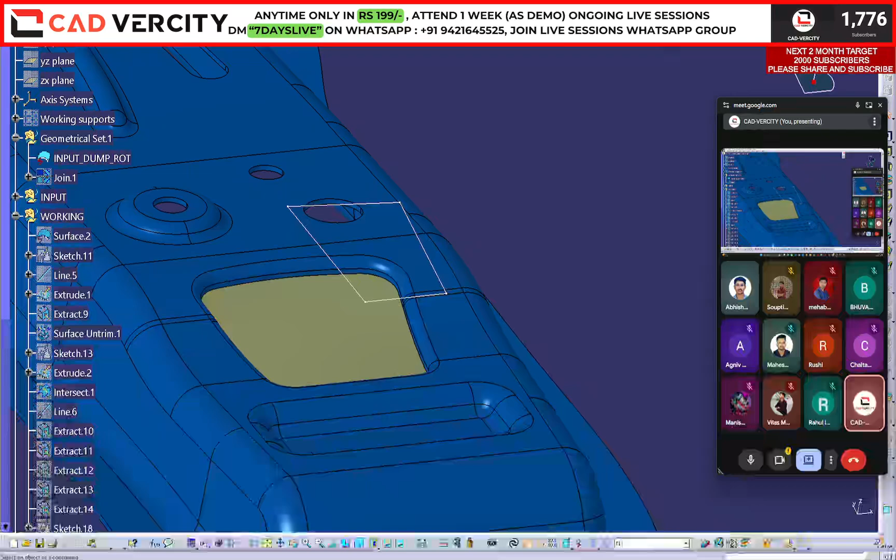Just- Yes. Okay, you are trying to match this one. Yes. Yes sir, I sketched only half of it. Positive. Then that...

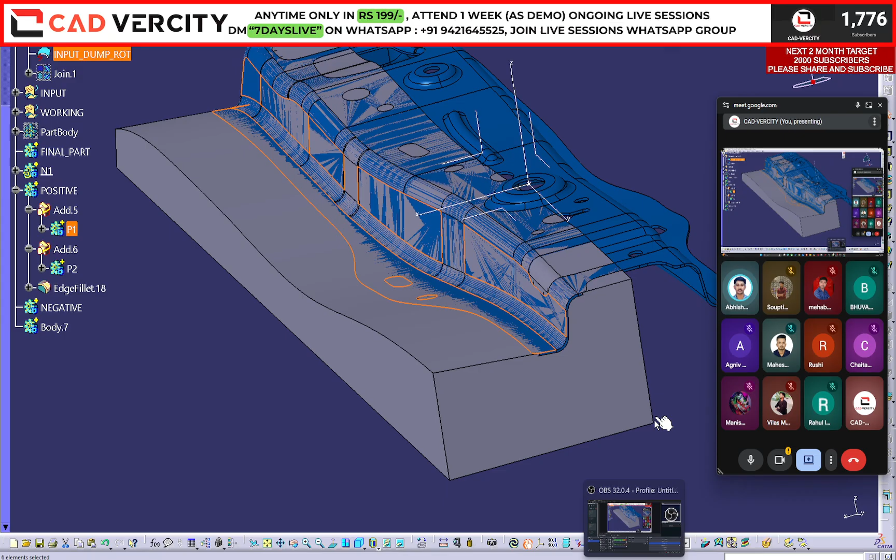No. You had done this side by your own or we discussed in live session? This. We discussed in live session, we discussed this, okay, up to this we have discussed. So you know how to match this one. Yes, I matched those two pieces, but the other side was not matching. This side is not matching.

No, not this, this is mirror side, the front side. Okay. This one. No, no, the just opposite side, the inclined one. This side, sir. I have tried by extracting these things. Which side is not matching? This one? The curved things, sir. The front side, the curve we have. The small gliding, sir, in the front. This extreme one? Yes, yes. Okay.

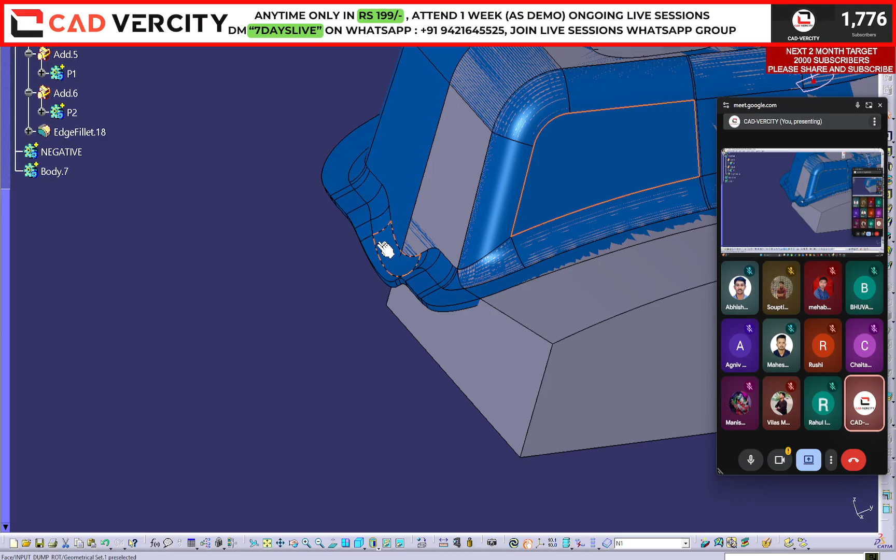Okay. We will work on this portion. So let's discuss. I think you had some issue on this pocket as well.

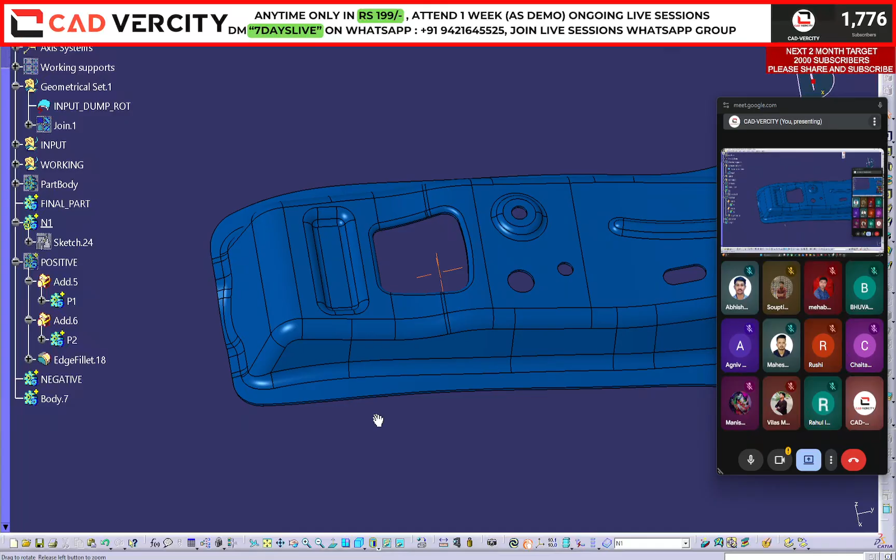Where is it? Do you have that body? This one? One sketch, it's working. Okay. Working. Okay. No issue. See. Let me extract this one. First, I will have to do some analysis. See, before starting anything, everything is kept extracted.

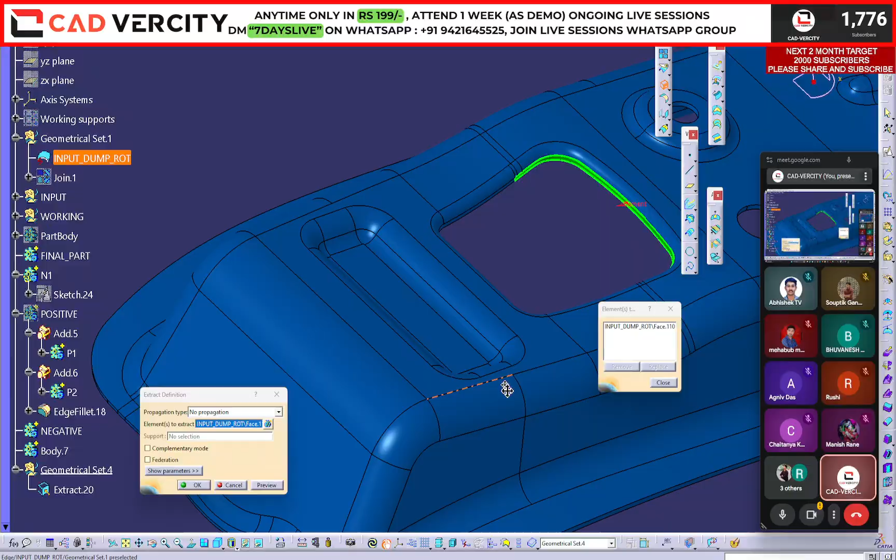Control 2. Let me take a new geometrical set separately for me only. Alt I G, enter, extract 1. No propagation. Multi selection 2. Okay, let's hide this one. Right click, keep over here, hide. Okay, now take the intersect.

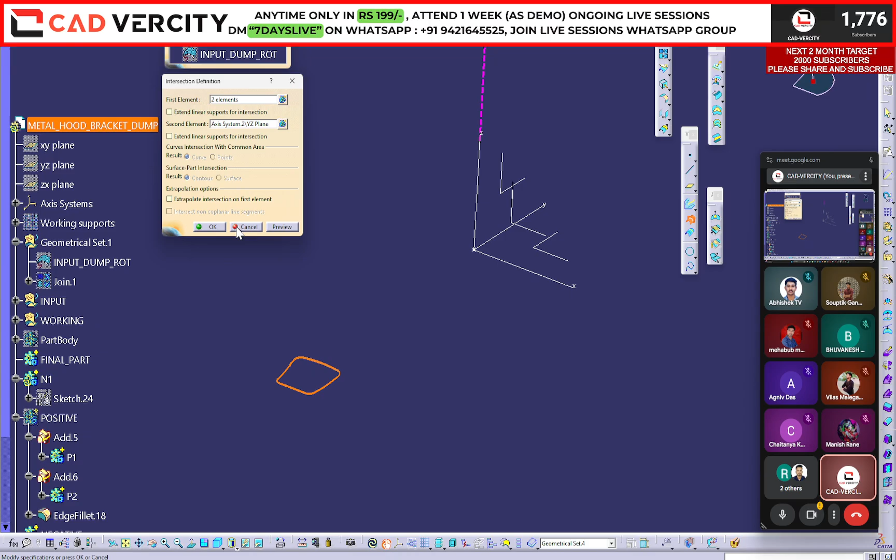See, in intersect also, let me show you. You can take intersect in one shot if you have two surfaces. See, we have two surfaces now, these two. So in first element multi selection, I will select both surface 1 and 2, close, and the second element I will select this one, and click on OK. See, I got intersect 1 and 2. Okay. Sir, what are you doing?

I just want to check is there any angle or not. Any geometry, this with MTD. See, there is angle 4 degree. This with MTD, 4 degree. Perfect. Similarly, I think there will be some angle with this as well. Yes sir, there should be an angle on the side too. So let's cross check. How? Let's put one line through this, or let's cancel.

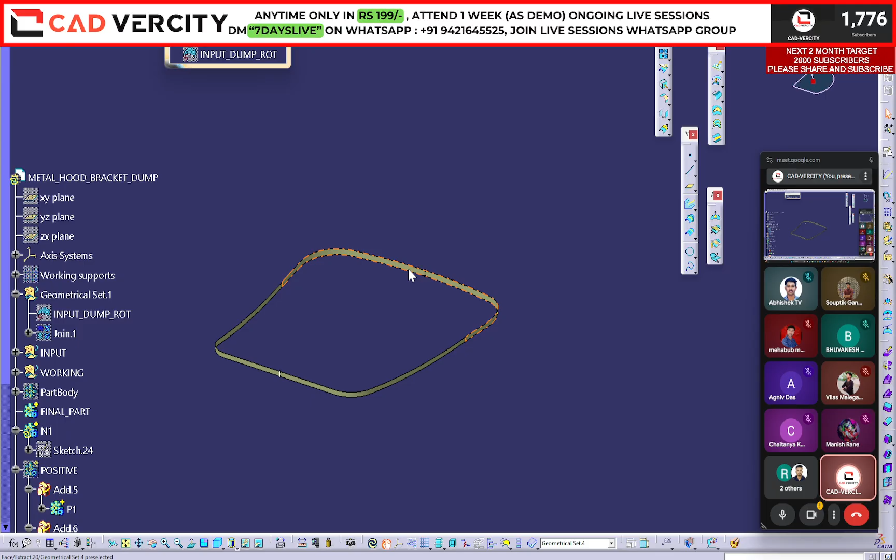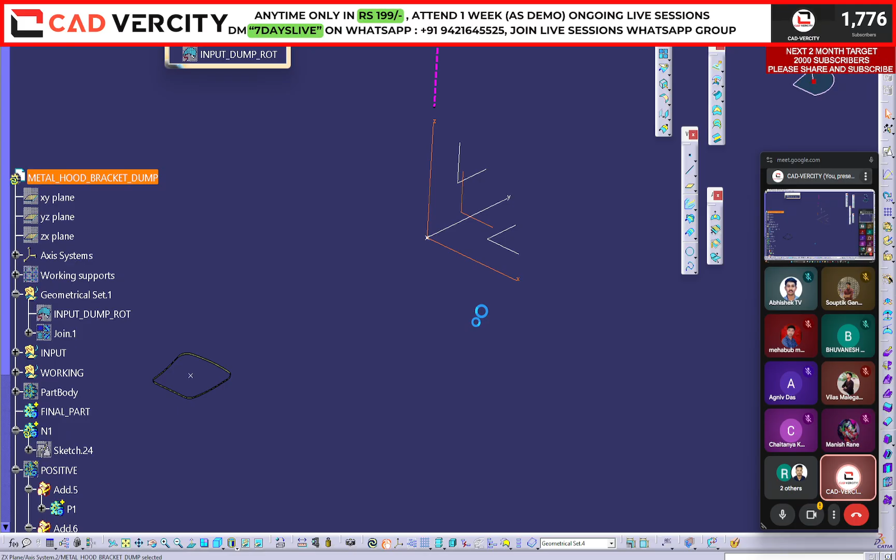Take a point in between this point and this point, middle point, click OK. Activate your master axis system, it is already current. So every time, if this is your master axis system, please change the property so it is understood clearly, and change the color, make it yellow or something else. It is already current, so let's take one axis system over here. By default we will get the same orientation like this one. Why? Because it is current.

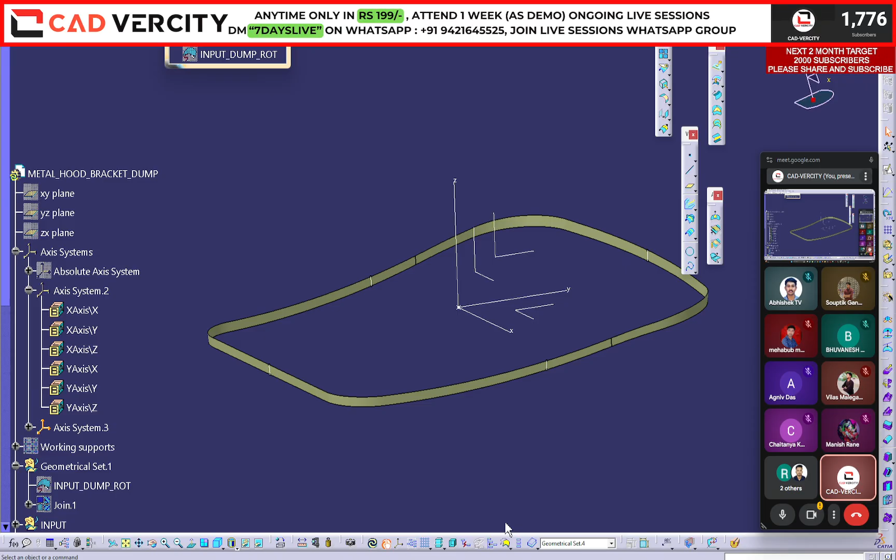Click OK. Now I will take the intersection. This is a single surface which will be in intersection with this one, click OK. This time you are getting two intersections, this one and this one. Do you want both? Yes. So I will click on keep all sub elements, click OK. Now let's measure the angle. Any geometry with this one. Angle is 4 degree. 4 degree. Perfect. Means we have 4 degree.

Okay, so let's do one thing again, with the surface, this one. You can do one thing. See, simple ways. Anyone knows what is a simple way? See what I will do here. Anyone? Manish? Top side sketch. Manish, Mahesh, we will draw this sketch in top side. Okay, no issue. But what will you do for the sketch?

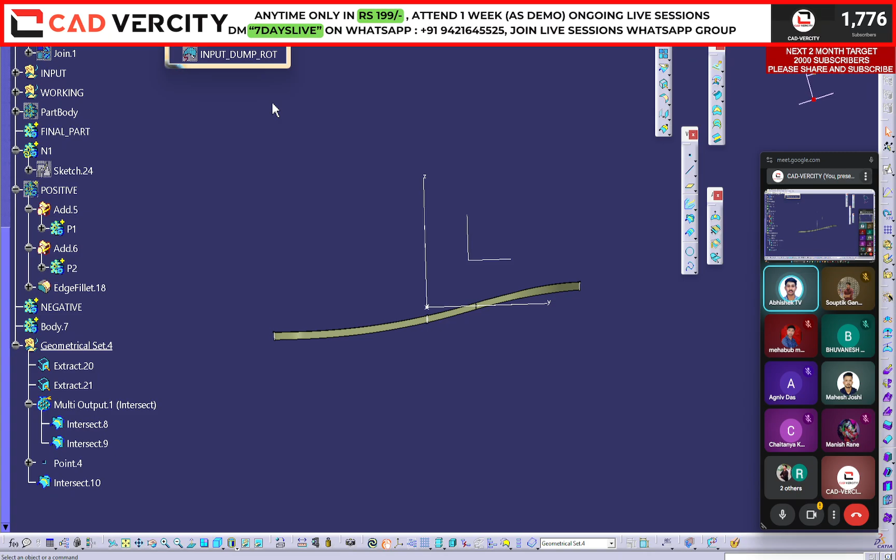How will you project? What will you project, sir? Which edge do we have to project? The inside one or the outside one? That is the question. What will you project? Its top edge? Rahul, what will you project? Why is the name showing? Mehabub, what will you project? Agniv, Bhuvanesh, Vilas, Manish, Chaitanya.

Yes. Hello. Can you hear me? Hello, hello.

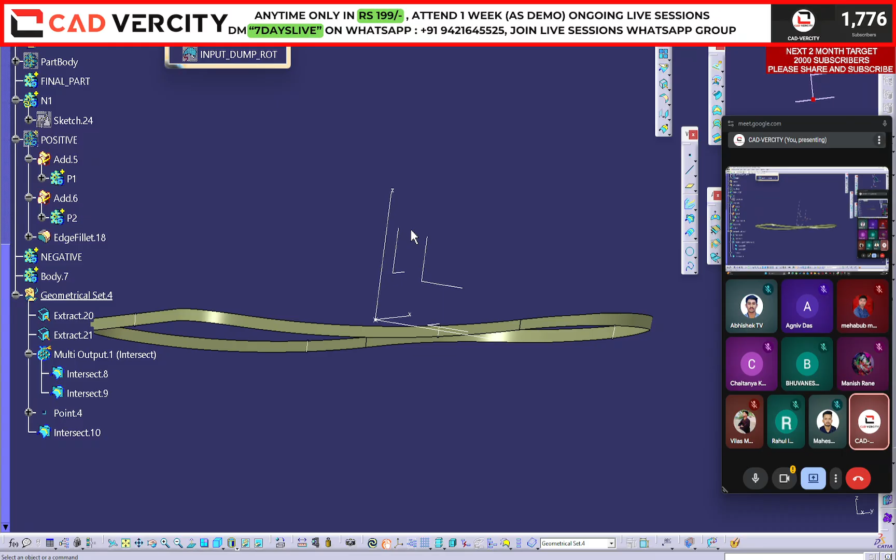What will you project? See, the simple logic is, tell me, you want to draw a sketch in the top plane, means your Z plane, yes or no? Are you getting any intersection of the surface with the Z plane directly? No. So can I extrapolate this surface by joining? Okay.

But sir, if in the tooling we have not projected those edges and drawn the sketch in the main tooling direction, it will not clear in tooling, I think. See, we have 4-degree draft. That means all sides should have a draft of 4 degrees. And with respect to the draft, we will need a neutral element, yes or no? Okay, so see, my logic will be something like this.

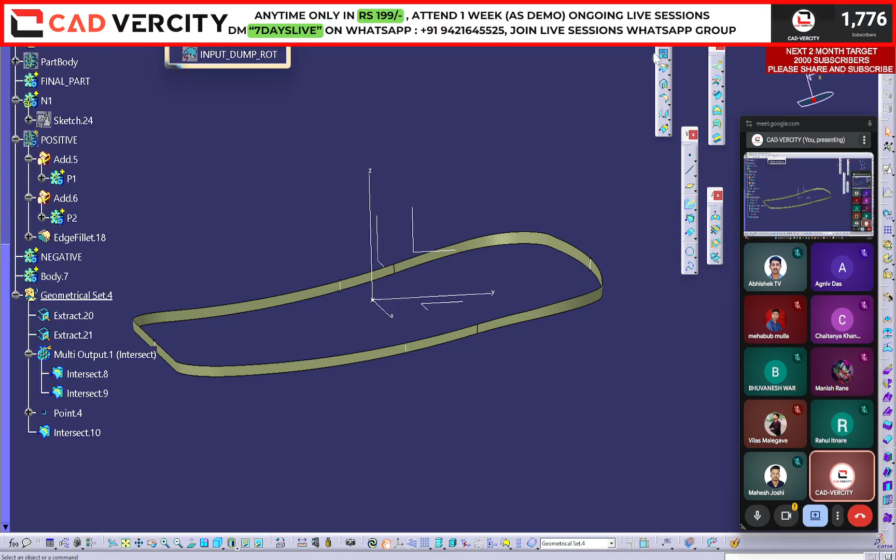I will join this surface. What I'm thinking about is the neutral element. Okay, I will extract this one in tangent propagation. I will extrapolate this. Good. Click OK. Hide this one. Extract upper surface now. Click OK. Extrapolate. Beginners, you can see what we are doing. Anyhow, we will repeat this one.

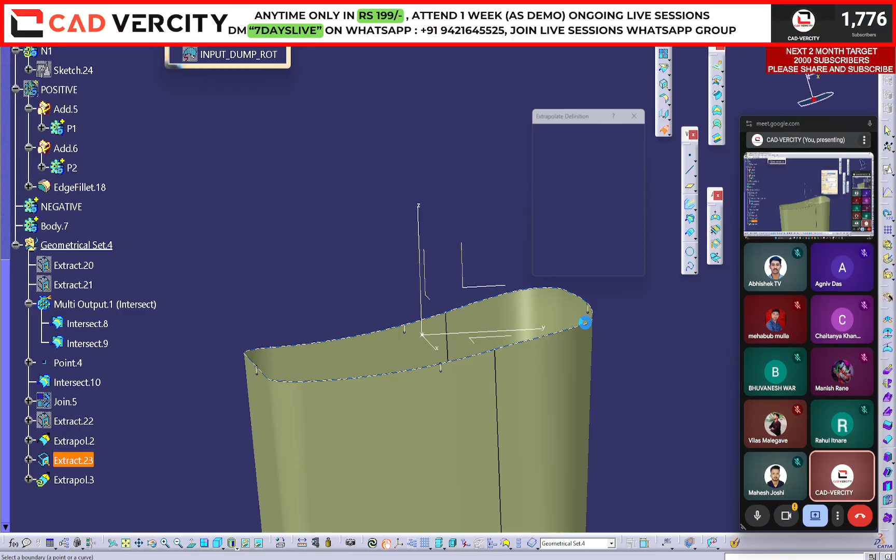Let me do one thing. Sorry. Undo. Redo. Where did it go? Okay. Done. Now tell me, can I take the intersection in the top plane? Yes or no? Sketch. See, this is my empty body, body 7. Position sketch on top plane like this. Click OK. This is the surface. Right click, extrapolate, intersect in sketch. Then exit. You can isolate, no issue. You can use Ctrl+1, pad.

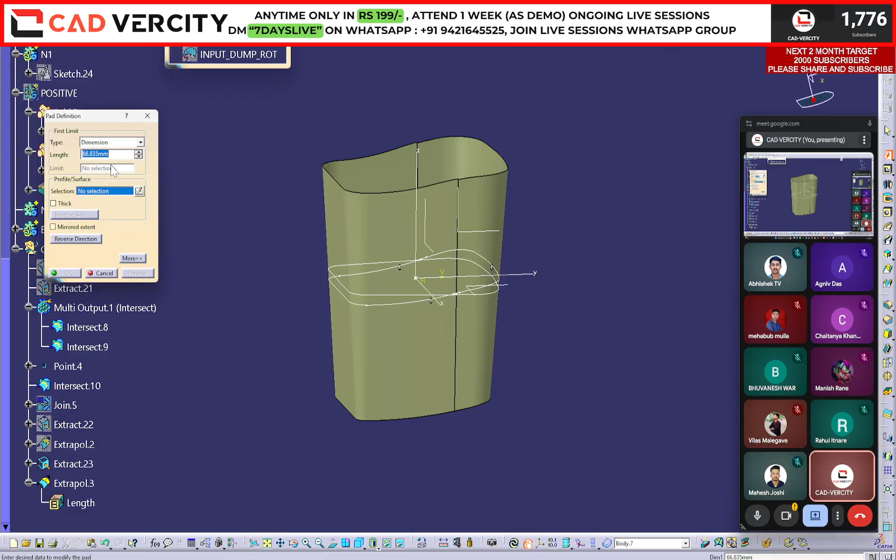See, we have the closed 3D curve. Let me try the pad command because last session it didn't work. Let's see. See, I can't select this profile. What I was trying: can we select the 3D curve in pad? Because in latest CATIA we can select. In this one we don't have the option. We can select this profile and we will have to give the direction for pad like Z. But right now we will use this one, top sketch.

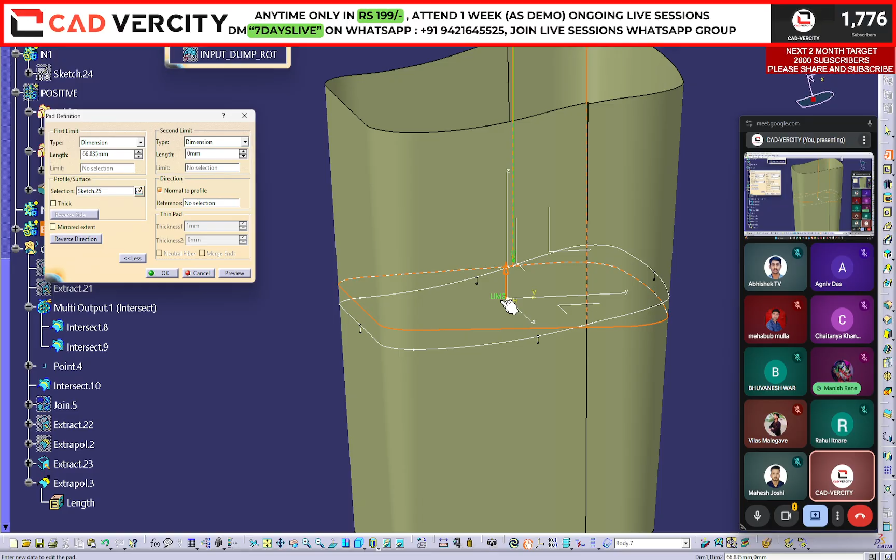Okay, let's extend on both sides. Don't extend too much, otherwise what will happen? Don't keep unnecessary pad value, because in the draft command it will fail most of the time. If your pad body is not a uniform shape body, it will fail. Now I can apply draft on this face. Tell me quickly, what will be the neutral element? The Z plane. Why? We took the intersection with the Z plane. Perfect.

Mahesh, Rahul, Vilas, Manish, Bhuvanesh, Chaitanya, Mehabub, Agniv, are you getting this point? Yes or no? Why I extrapolated this surface? Why I was thinking regarding the neutral element? Abhishek, do you see now how simple giving the draft has become?

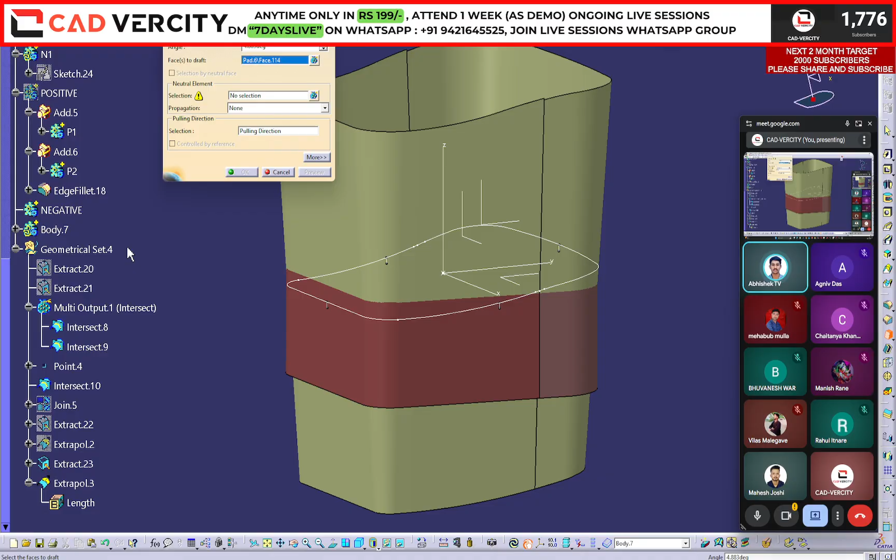You have converted these turning corners into sharp corners, yes? We can do that now too, no issue. In this sketch also I can do this thing. I will have to isolate, I will have to trim this one, then I will apply fillets. No issue. See, let's do it.

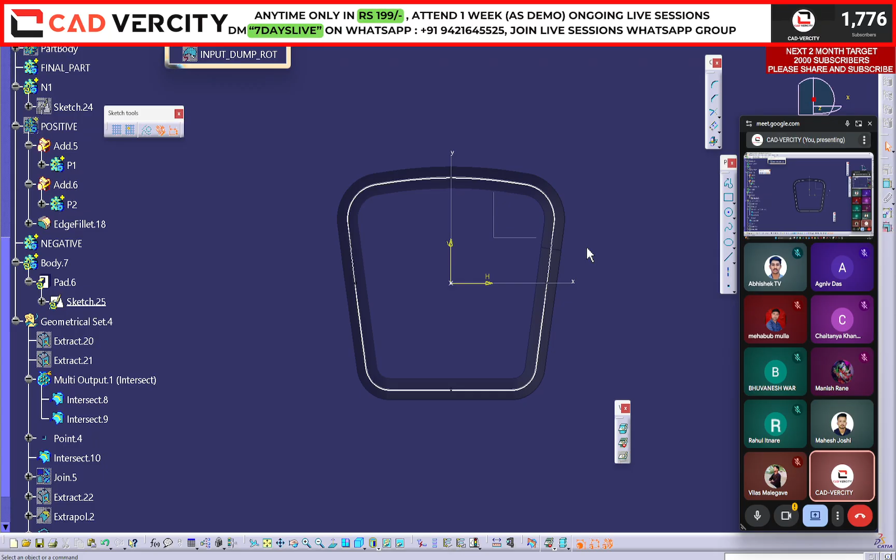Okay, see, after isolate, you are not getting this corner as a separate entity. So that's why. What I was thinking, I will get one point over here, second point over here, then I will delete this one. Undo, undo. Okay, so what you can do, a spline: one, two, three, four, and five. Exit. I think these are straight lines. So I will draw a straight line tangent to this one. I think I can use mirror. Where is my mirror command?

Okay, and the bottom line, I think it is horizontal. So passing through this one, let's draw one horizontal line. Trim this option, trim these elements.

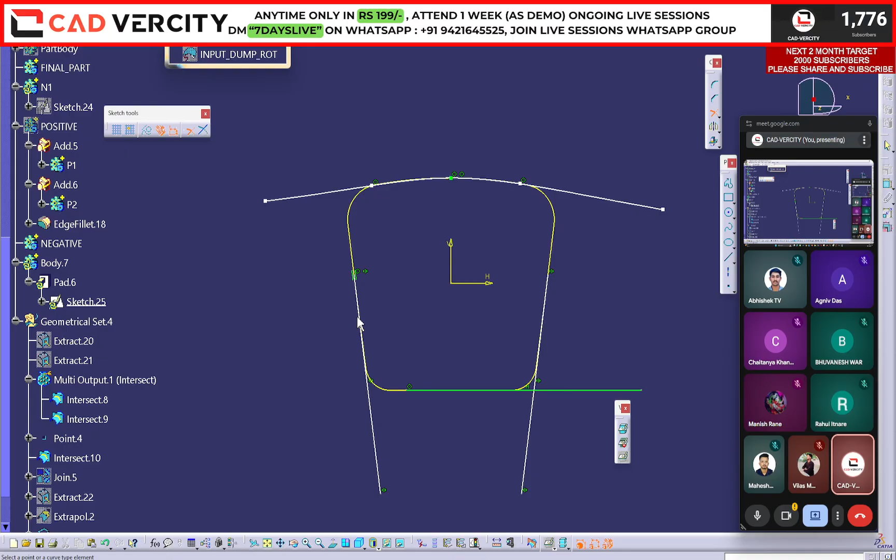We can do one thing. I think this should be tangent to this one like this.

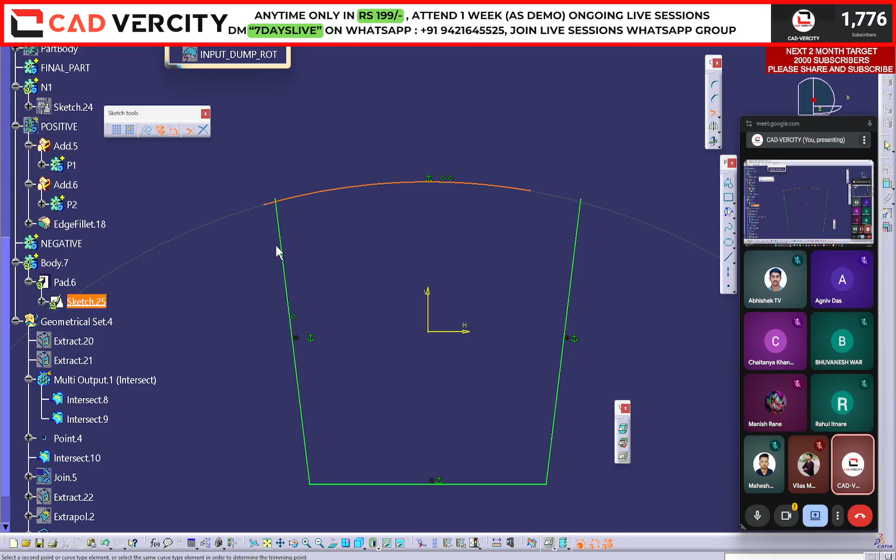The best way, see, spline will not be the exact match or the exact solution, so I will use this one. See, now I will use trim. Exit. Now Abhishek, same thing we will do what you have done in your file. What we will do first? We'll apply draft on corner. Corner, draft.

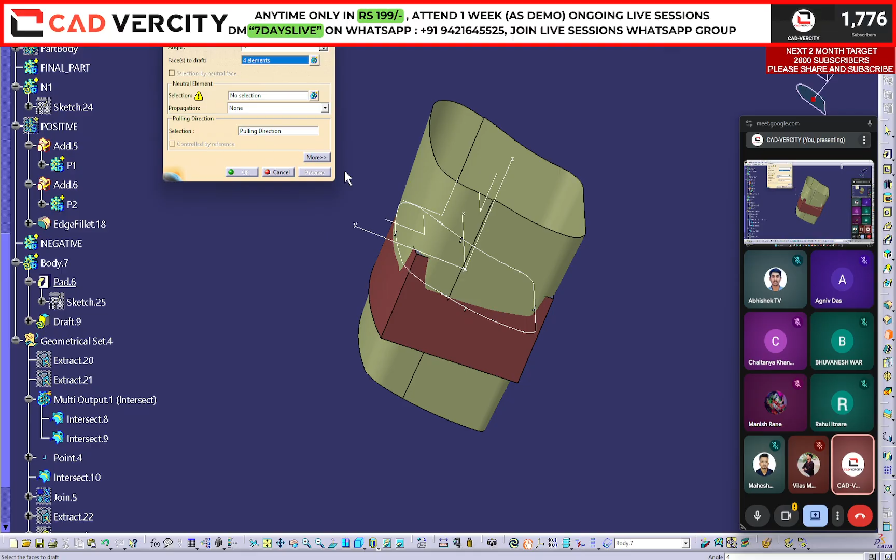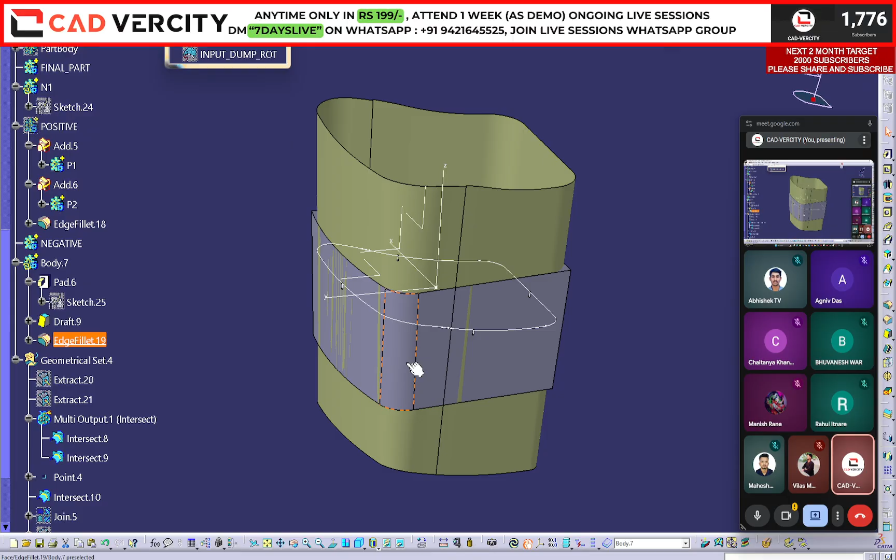I think 4 will work. No. So 5 will work. 4.75. Again, it will not work. Why? See, let me tell you, first of all, it is not a corner. Why? Because you don't have the smooth edges.

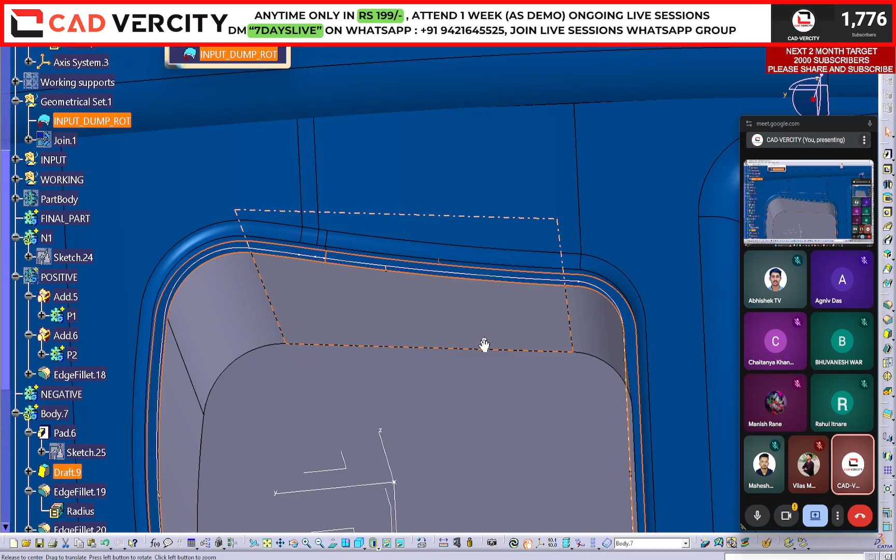Yes, right click. See, I will not extract directly from the positive body. I will not extract this surface directly. What is a good method? How to extract the faces? Quickly.

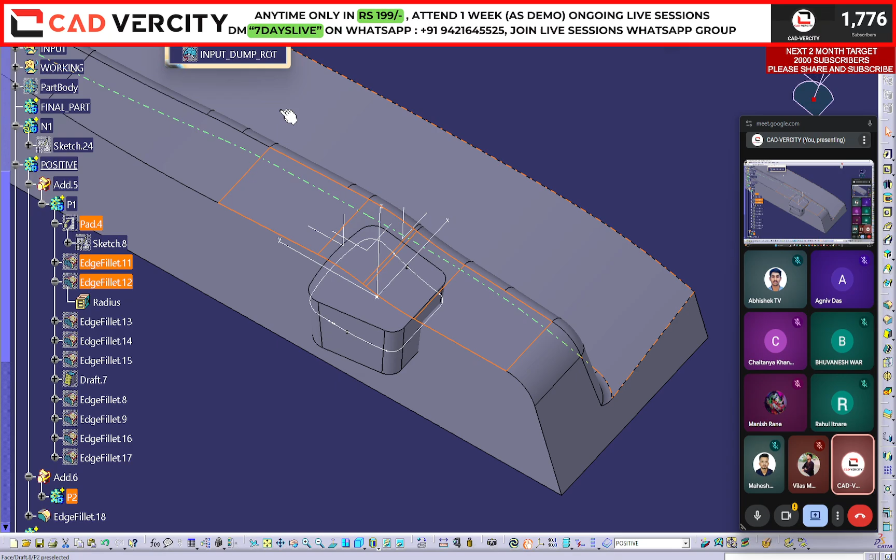Sir, sketch पे जाके वो... You should extract any element. If you want to extract, you should extract it from the main source. Main source means, tell me on which command you got these faces. Quickly. After which command? Sketch? Sorry? So from sketch. No, not from sketch, from pad 4. Right, हाँ, click F. Yes sir. Yes or no? Okay, not from pad 4.

Define from EdgeFillet 15, you got 1 2 3 4 5. Yes or no, everyone? Rahul, Mahesh, Vilas, clear? Yes, sir. So define this one. See, you can extract from this as well. यहाँ पे भी आपको वो surface मिल रहा है. But just to avoid the update cycle issue. याद है update cycle issue? You know the update cycle issue?

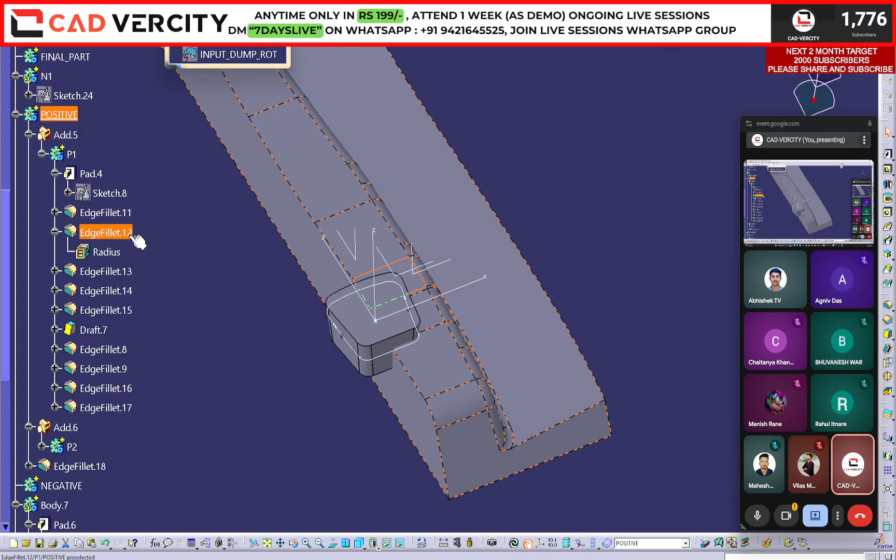Yes, sir. See what will happen if you extract surface from this stage by defining this one. That means you are keeping the relation of this surface from positive body. So you can't perform any operation on positive body. Got it? But what we can do, we will keep the relation from here. जितना नीचे रख सकते उतना नीचे रखेंगे. इसके बाद क्या किया आपने? What is this? No issue, हमें वो नहीं चाहिए. We want only these faces. 1 2 3 4 5. That's it. Control, extract. Click OK. Don't use tangent.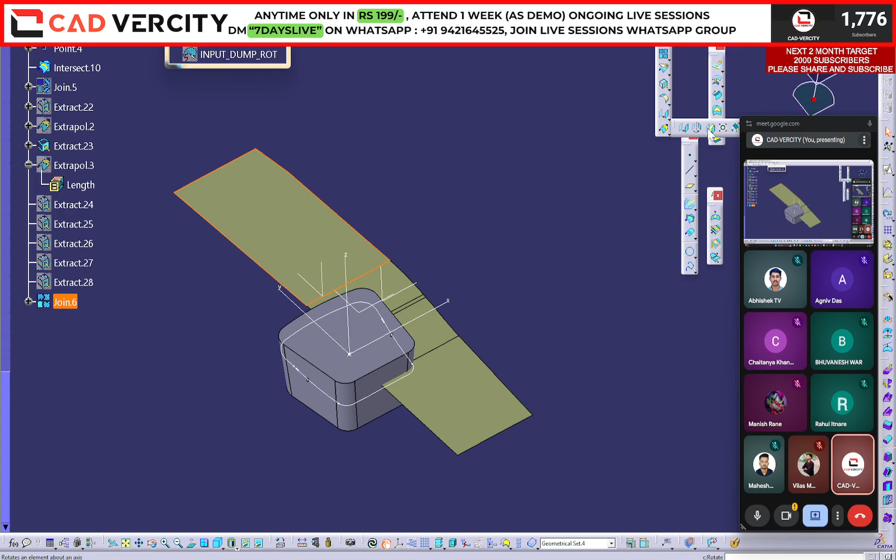Right click. Delete this one. Undo. Extract. I don't want tangency, I want no propagation. Okay, I will hide this one. Use join command, right click distance propagation, click OK. We'll use mirror for this one. What is this? Symmetry. Okay, with respect to our master axis system, click OK. Join again, enter. Let's check in smooth mode. There should not be any sharp edge after mirror. Perfect.

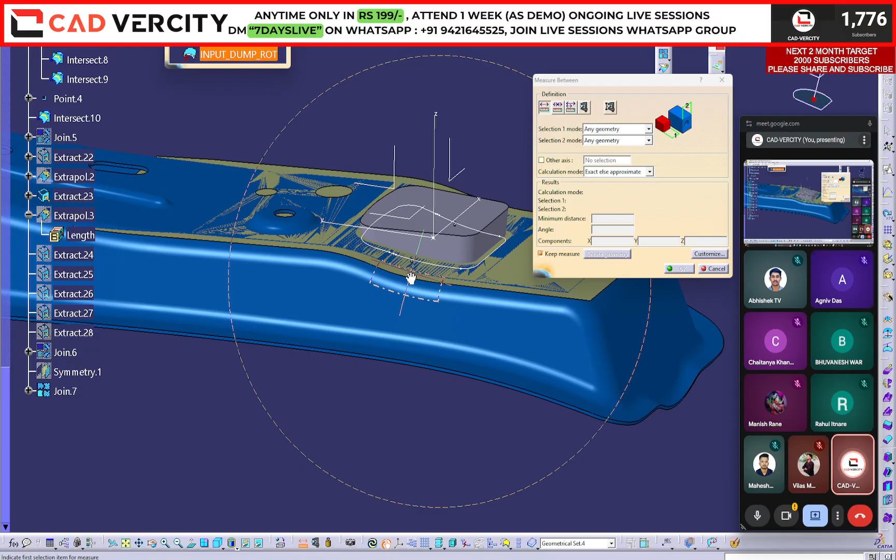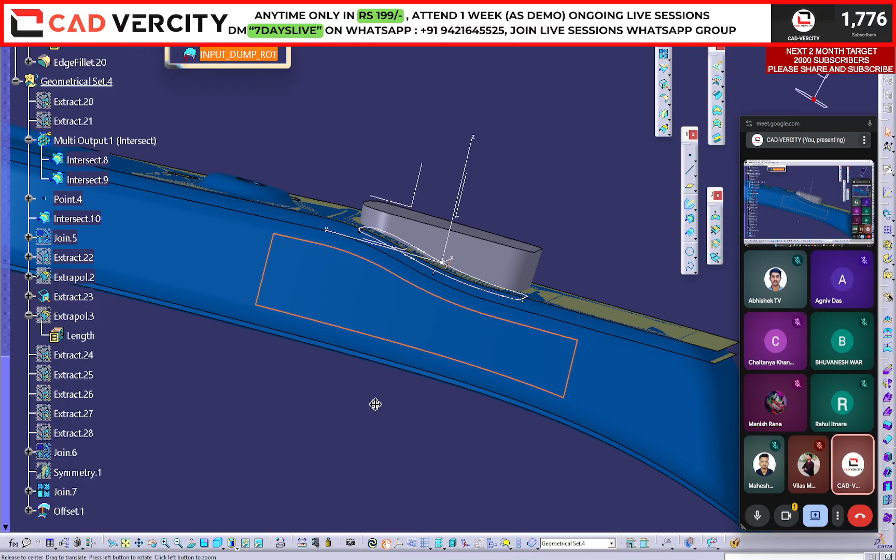Now, what is the offset value? From this surface, see, we can't select this surface. So this should be converted into surface only. This surface till this one. What is the offset value? What happened? Surface, any geometry. From this surface till this one. What is the value? 1.9 something. Copy this one. Offset this surface downside by reverse. Okay. Oh, sorry. Double click. This should be reverse. Okay. See? Is it matching?

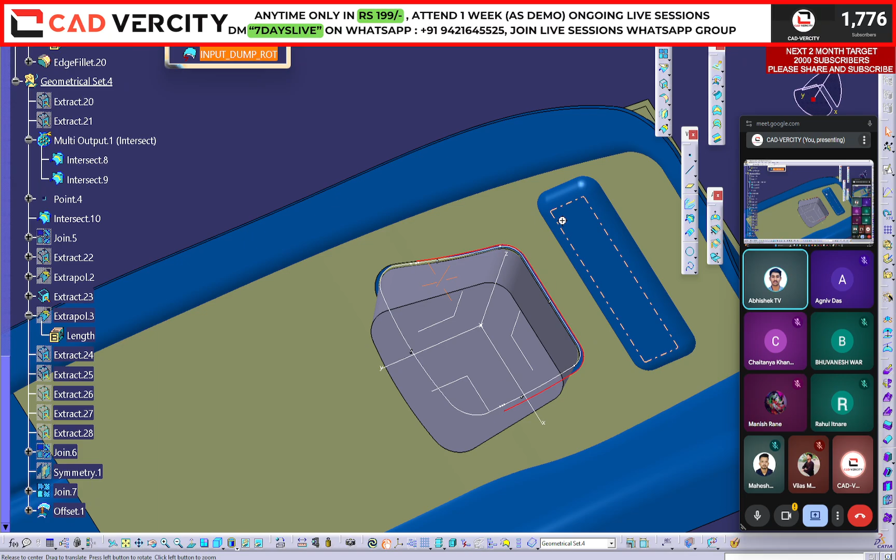Match नहीं हो रहा है. I think it is 2 mm. Double click. It is 2 mm. Not matching exactly. Shell के बाद फिर match होगा, I think so. But सर, अगर नीचे extract किया तो? यहाँ पे edge height ज़्यादा दिख रहा है and यहाँ पे थोड़ा अंदर गया है. हाँ, that is the issue. Means it is not an exact offset of upper surface. You should draw a separate curve for this one. Yes, Mahesh?

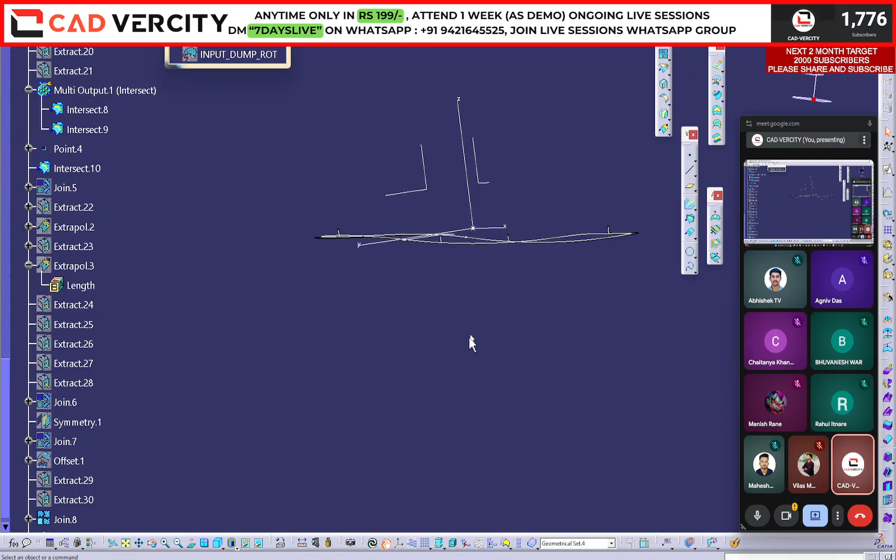नीचे का surface अगर extract किया तो? Which surface? This one? From the dump body. From dump body we can extract, but again there will be no parametric relation. Non-parametric. See, for now, if you want to keep this, you can keep it, no issue. Because anyhow you can change the shape of the cutout by editing the top sketch. Yes or no? Yes, sir. You want this surface only for limiting purpose. So I will use the fill command by keeping tangency of this one. Click OK like this. Good, Mahesh. Good idea.

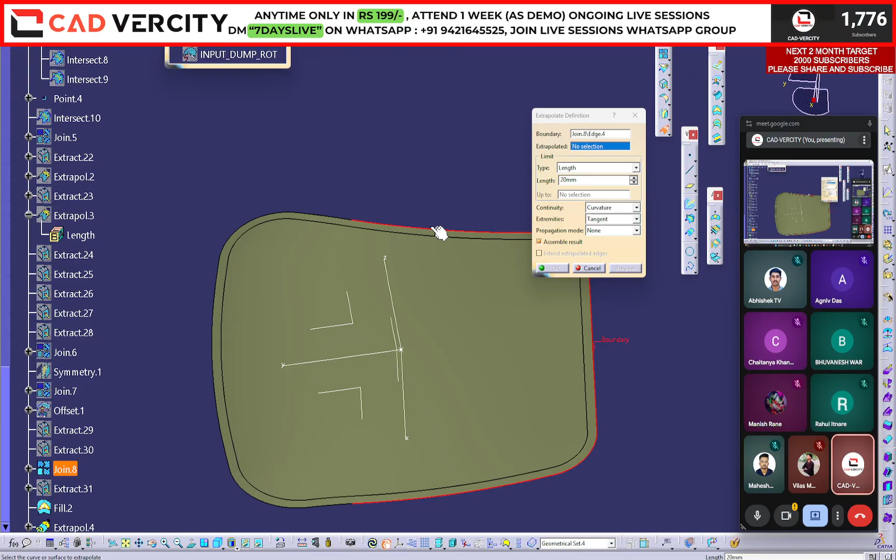See, कभी कभी हम dump surface और dump element use कर सकते हैं. Why? What is the benefit? See, sorry, undo. यहाँ पे keyboard पे current क्यों आ रहा है? Extrapolate this surface curvature. See, don't extrapolate unnecessarily. Just try to keep as minimum as possible point propagation. Try to keep value as minimum as possible. जितना काम का उतना ही रखिए. Join this with this one. 0.03 or 0.001, no issue. Now you have the pad.

What Mahesh mentioned, can we use the lower surface directly extracted? Yes. Why? Because in future, what are the possibilities of modification? Tell me. The shape of the cutout, the position, draft. So we have the draft option, we can change the draft, we can change the fillets, we can change the shape and size of the body. Again, what are the possibilities? Side radius. वो तो हो गया ना discuss. The position, the depth. The depth of the cutout we will have to change in future as per the requirement. So we have the surface which we will use to control the depth.

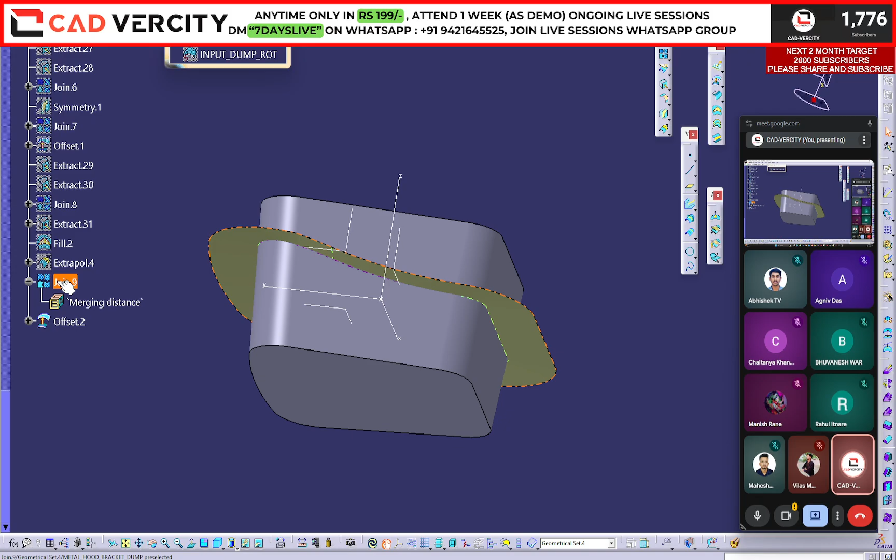So select this and let's say put a 0 offset on the left side. Okay, and hide the join. Yes or no? What we have done, we have used one offset with 0 mm offset. Yes, 0 mm value. Now this is my body and this is a dump.

Can I do one thing? Directly double click on pad. Okay, let's define this one and split it in part design via split option. See over here. Here we have split option with help of this surface. Downside arrow or upside arrow? Arrow should be which side we want, upper or lower?

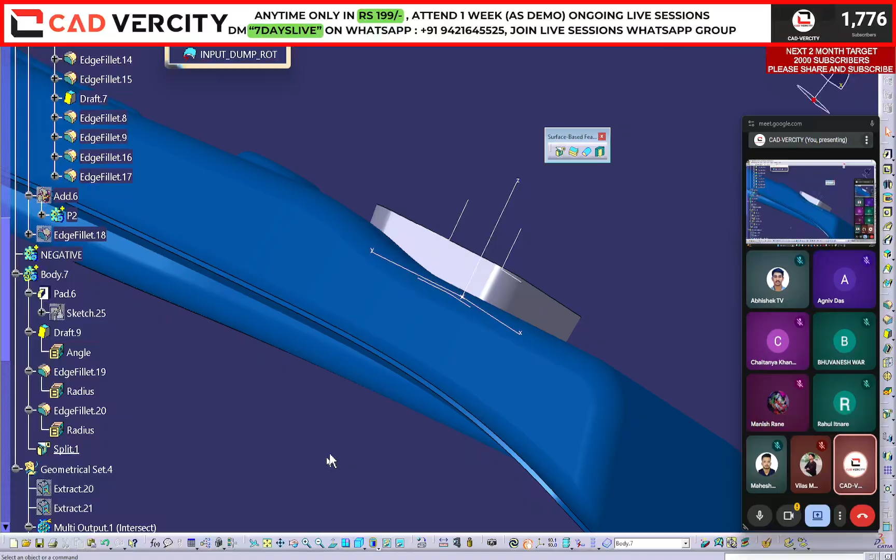Upper. We want upper. So arrow should be on upper side. Click OK. Done. Now see, in future you can use this body for removing purpose, yes or no? Boolean operation. So in future, let's say if someone is telling you we will have to increase the depth. Right click, show the offset, cancel.

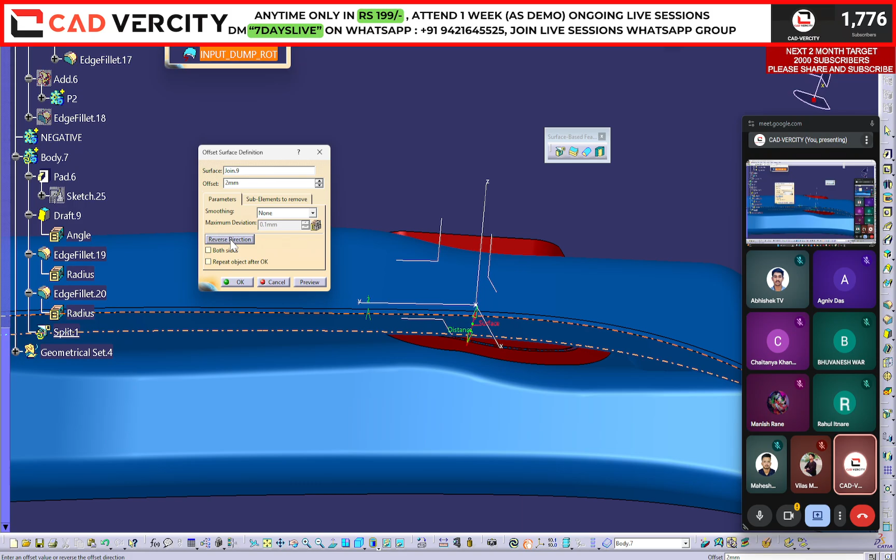Double click on the offset, put 2 mm. Let's say 2 mm. Reverse direction. Let's check upside or downside. Reverse direction, downside. Click OK. We have changed the offset value. Right click on the split, update. Done. Yes or no? Yes, sir. Simple.

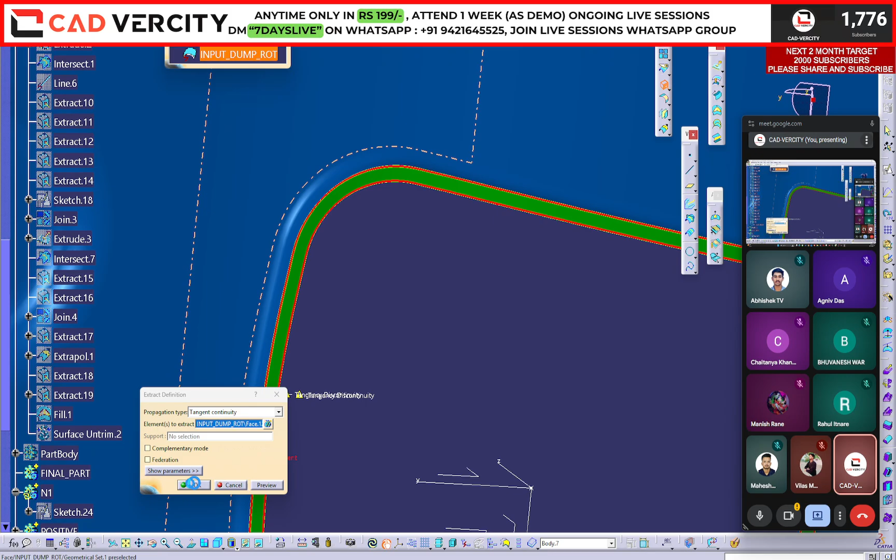You have extracted. Everyone please focus. No propagation, or let's select one face with tangency. Okay, you have extracted this face and here you gave a fill. Yes or no, Abhishek? Tell me, when giving the fill, did you give it tangency? No, I didn't.

That's why, what did we notice now? This face is perpendicular to our vertical face, which has a 4 degree draft. Yes or no? We have the 4 degree draft. After that we had this face perpendicular. So if you are using fill command, you filled this. Done. So tell me, if you join these two, there will be sharpness here. Yes or no?

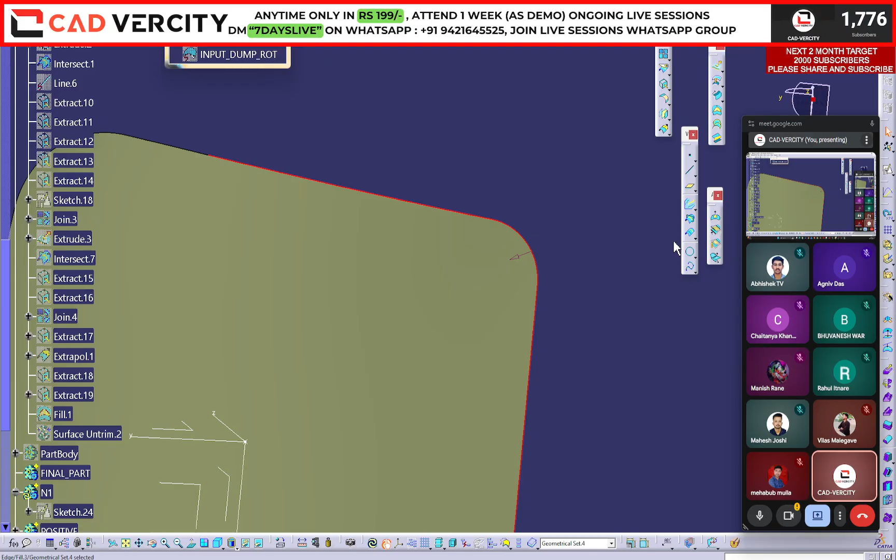Means this fill is not in the flow with respect to this surface. So double click on this one, give the support, then OK. Now you can hide this one. Now try to extrapolate. You had extrapolated, yes? Or I think you had done untrim, yes? Yes, sir. Now let's use untrim. Now let's try. See, is it matching? See, it is matching.

Let's extrapolate this surface with point continuity and curvature, 5 mm. Okay. See, is it matching perfectly? Are you getting the logic? Yes, sir, I understand. What am I telling you?

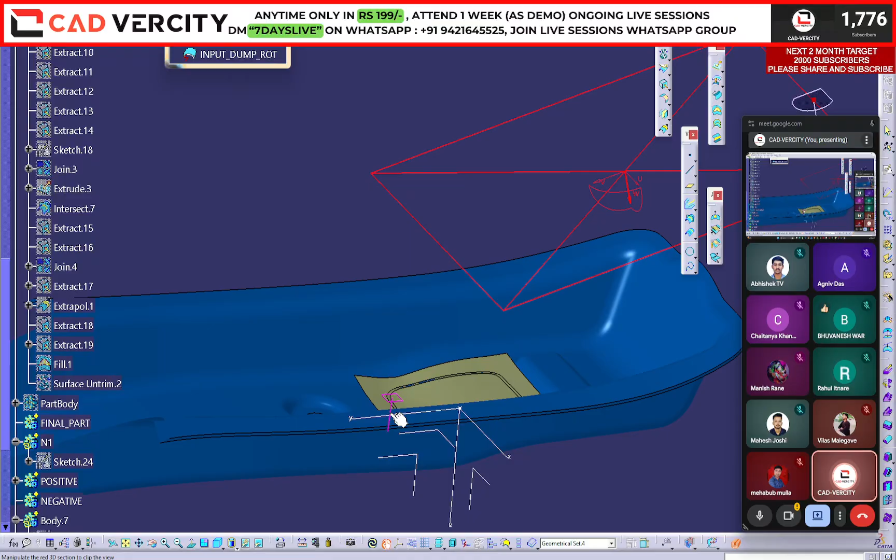Bhuvanesh War, Agniv. I hadn't kept the tangency on the fill. That's why. See, let me show you practically. Let me show you like this. Okay. See, everyone, please focus. You had this edge. You had the second edge. If you are applying fill without any support, your fill will be a straight fill. Yes or no?

Yes, sir. Agniv, Bhuvanesh War, Rahul, Mahesh, yes. Manish, yes, sir. Chaitanya, yes. Vilas, yes. Mehabub. Okay.

This will be a simple fill, what Abhishek has done in his file. But what I did, again, second thing, after this fill, if you are using untrim and your expectation is, sir, this should match like this. But after untrim, your surface is going like this, yes or no? Yes.

But what I did on my side, the pink one. I used fill with tangency support. So I got surface like this. After untrim, I will get exact surface like this, even after untrim and extrapolate. Got it?

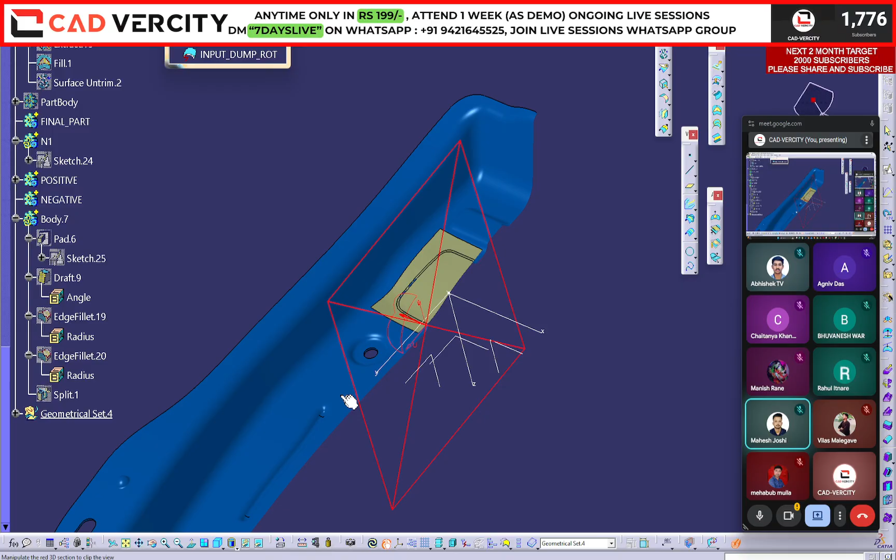Anyone? See, what is the question? Sir, can we use the same surface as a limiting surface directly in pad command? Quickly. Rahul, Mahesh, Mehabub, update sir. Sorry Rahul, can we do this, yes or no? Did you understand the question? See, what is the question? Abhishek, could you please repeat your question?

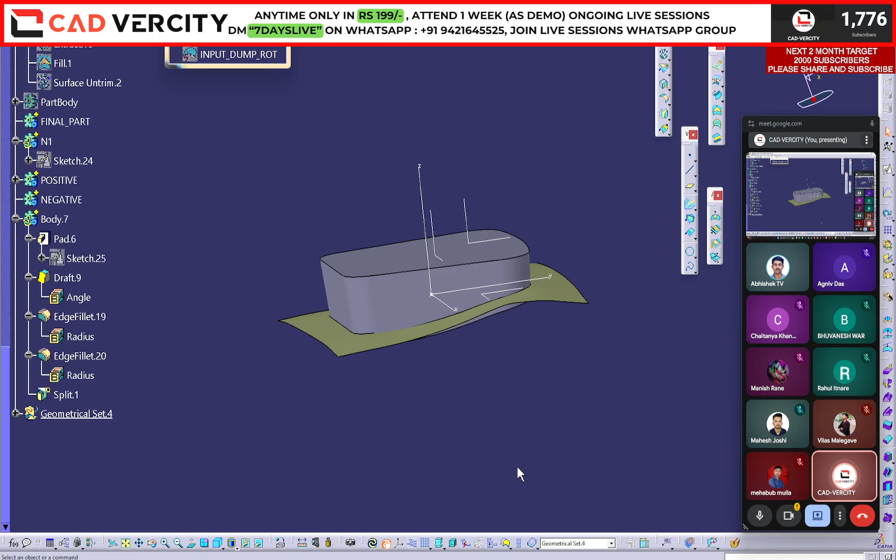I tried it. See, directly if I click on it, in pad, up to surface, I think there will be a problem in draft. What Abhishek is asking, in pad command, can we use up to surface for this surface directly? Yes Mahesh, what is your point? No sir, no no, what was your point? Where will the issue be? I think there will be a problem in draft, sir. Yes, yes sir, yes yes yes, because that has been...

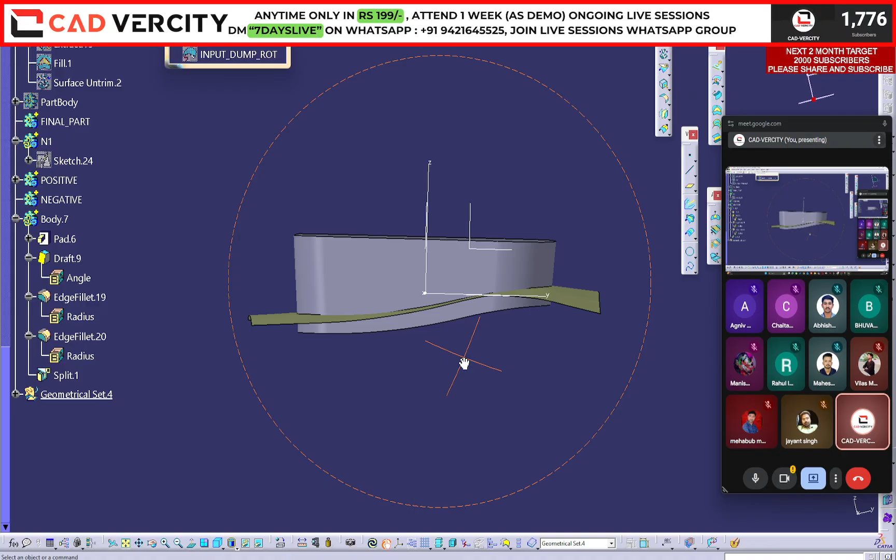Why? Because you will need some neutral element. The neutral element you are using is in top, this is the top plane. Okay, and when you split here, I think this portion there will be no material for the draft. So maybe it will work or it will not work, you will have to check. Sometimes how it behaves is logical.

It is logically done, see, if you split it, you will split like this. And after split this will be a neutral element like this, so you don't have any material over here for draft. Are you getting it? So it may be that there are chances the draft will fail or it will pass, don't know, it depends on the logic of CATIA.

So instead of wasting your time like this, first let's apply draft, then split it as per your requirement. Clear? Yes sir, yes sir. Perfect.

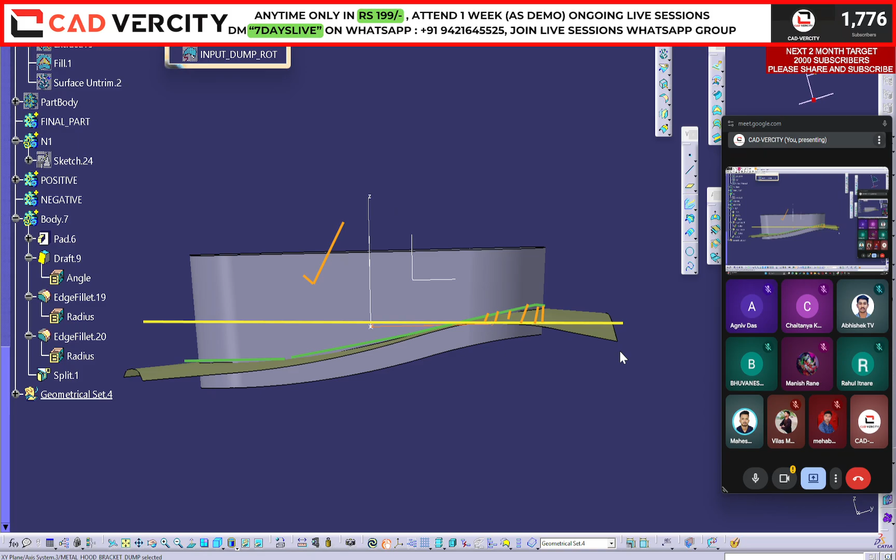So everyone, please finish this assignment as soon as possible, because from next session we will start your project work. From next session, see, right now there are so many topics and doubts, but instead of discussing the small topics, we will start our project work. Automatically we will start our discussions on some complicated portions, so automatically your doubts will get solved.

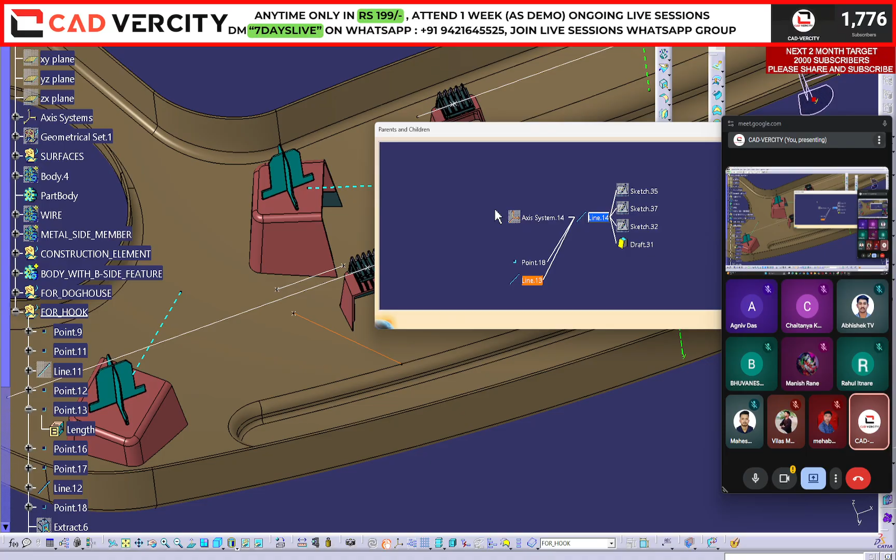Right click parent children, show. Okay, ये लाइन कहाँ से निकाला आपने? What is this? Right click show. I think your support is not okay.

From where? See, to define this line, you have used this line. Here you can see line 13. Line 13 means this line.

Let's see what you have done over here. Right click A, extract. What is this? Right click A, point this one. You have taken one point somewhere here, and you have this curve. And you have isolated this one.

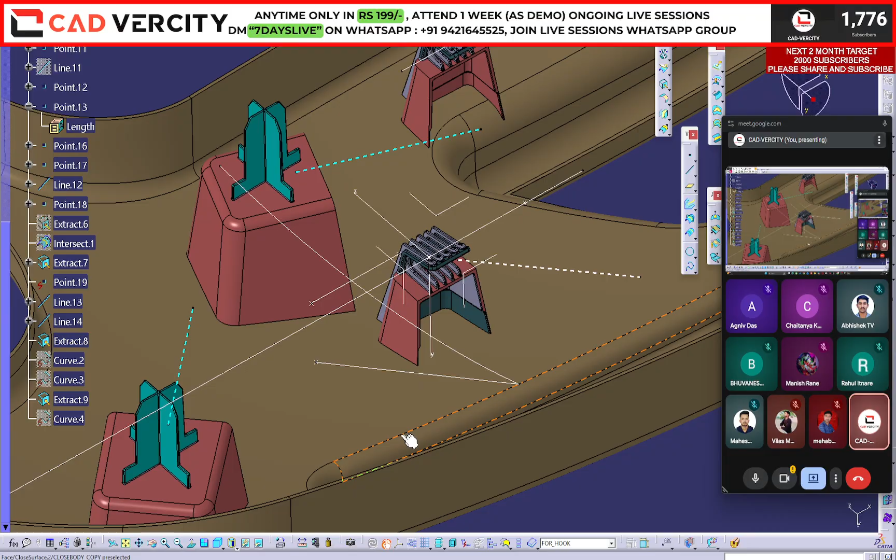See, the main issue - see what is the main issue? The main issue is previously, अग्नि का जो ये एक्सेस सिस्टम था वो यहाँ पे था।

Yes or no? Got it? Yes or no? Yes sir, okay. And see, मुझे नहीं पता अग्नि ने क्या किया था, but logically what I'm thinking, how was the history - यहाँ पे एक्सेस सिस्टम था अग्नि का, और यहाँ पे इनका ये कर था।

Yes, Agni has taken one point over here. यहाँ पे एक point लिया था अग्नि ने, and ये उनका end point था, and what he did, he has created one line like this to find out the lifter direction, और ये line के साथ उन्होंने 1 degree रखा था। Got it? 1 or 2 degree.

हाँ सर। Yes, but what Agni has done - Agni has converted, Agni has isolated this point, but not isolated this curve. Okay, so with this line, Agni has taken the intersection, that's why he got this curve. On this curve, he has taken one point, and from this point until this end point, he has taken one line. And Agni has shifted this axis system over here now.

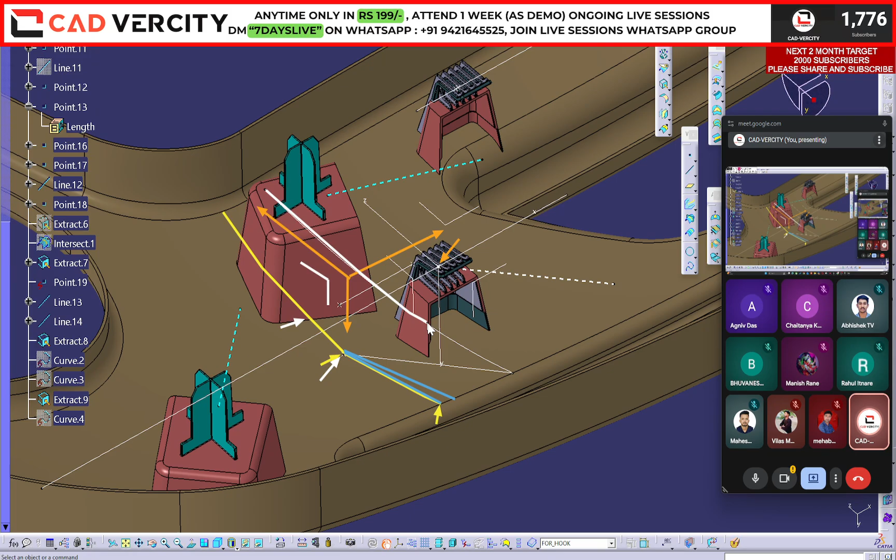So he got the intersection. Why? Because it was parametric, it was not isolated. एंड ये पॉइंट तो लाइन को मिल गया है, लेकिन ये आइसोलेटेड पॉइंट यहाँ पे रह गया, दैट्स वाई ये पॉइंट, ये लाइन ऐसे हो गया। गॉट इट?

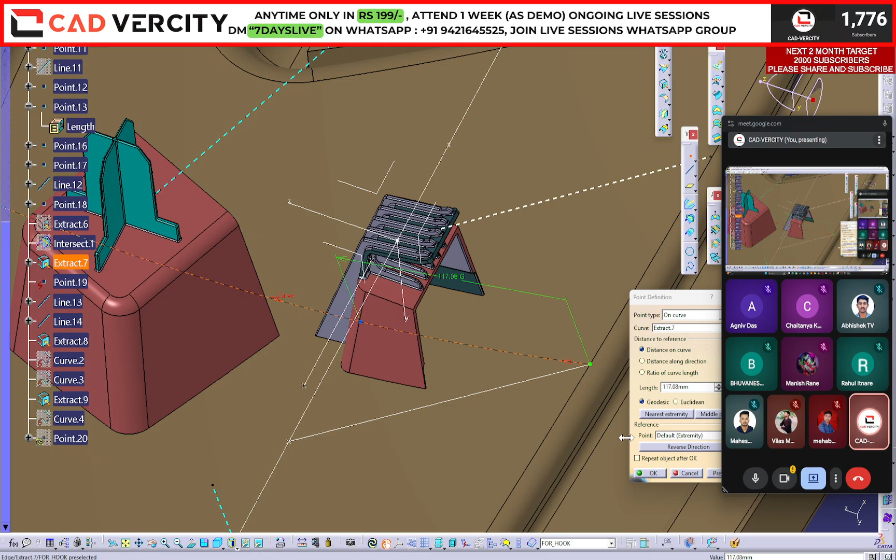Take one point on this one, or what you can do, just think on it. What distance should be kept? You will have to think. Tell me which portion you have to cover in your lifter, this inner portion, yes or no? These are your extreme faces for the lifter, the inner extreme faces. So let's keep this point over here.

Okay, I have taken one point anywhere. Double click on this line, and see, this is your point 1, can you see this point 1? And this is your point 2. Just select here, replace point 1 by this point, click OK. Now right click on this line and say local update. Is it clear now, Agniv?

Yes, yes sir. Now I think in one shot you can update, right click, L. Done. Okay.

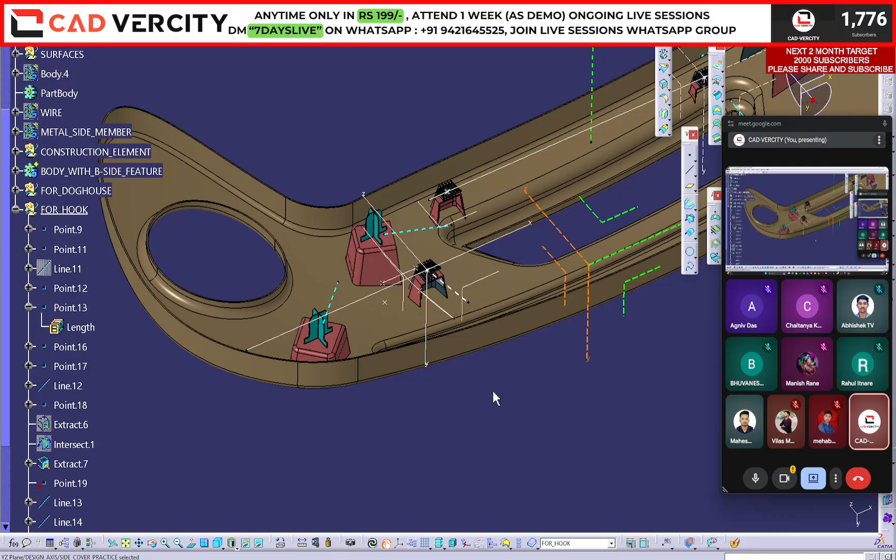Issue won't come, but it depends on your surface. Let's see, you have converted this point into coordinates, but with which axis system will you keep the coordinates? The master axis system. Yes, but Mahesh, if Agni has shifted the axis system here, this point should be aligned with the axis system. In that case what would you have to do? You will have to change the coordinate as well, otherwise you will get the same line like this.

Got it? See, what we want is as quick as possible. Just as I shift the axis system, this line should also move in one shot. What are you doing? You are changing the coordinates with your master axis system. So you can do one thing, you can keep the coordinate relation with this axis system. Are you getting it? Yes, if my axis system changes then this point will also change. Why? Because our coordinate is with this axis system. But what will be the issue in this?

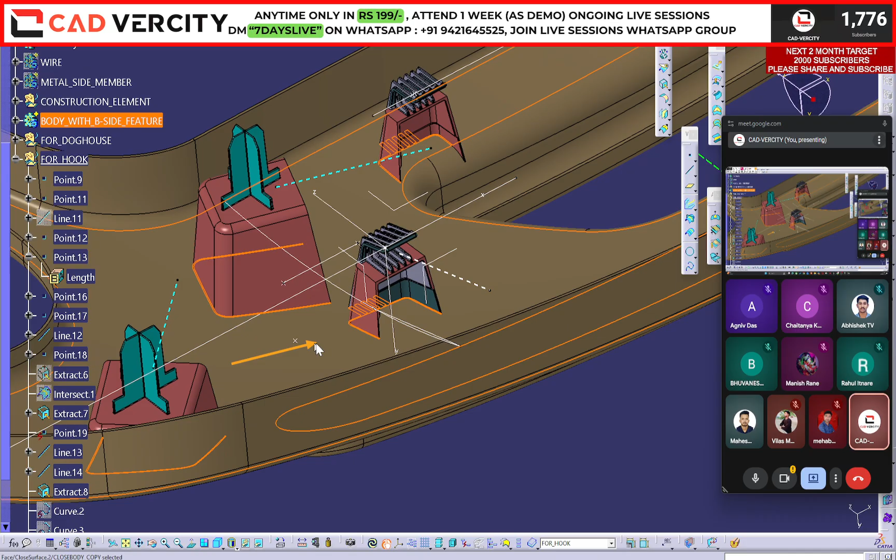What will the issue be? The issue will be if let's say this surface is not like this, it is something like this, suppose it is going upside, like this the surface is going. Now Agniv has shifted this axis system somewhere here, now this time Agniv has shifted like this. But let me tell you, if I ask Agniv to shift the axis system over here, then this point would also come up here. Yes or no? Are you getting my point?

If you are taking the coordinates, yes. So I will not prefer to take the coordinates. I will prefer to keep the relation with this curve, because this is our base curve, base thickness curve. Undercut is going to come here, not going to come up there. Got it? Yes sir.

Okay, if you want to break the relation, can you do one thing? Agniv has taken one surface intersection, this extract. Can you do one thing, can you isolate this surface directly? Isolate this surface itself. Then sir, you can keep the relation with the curves.

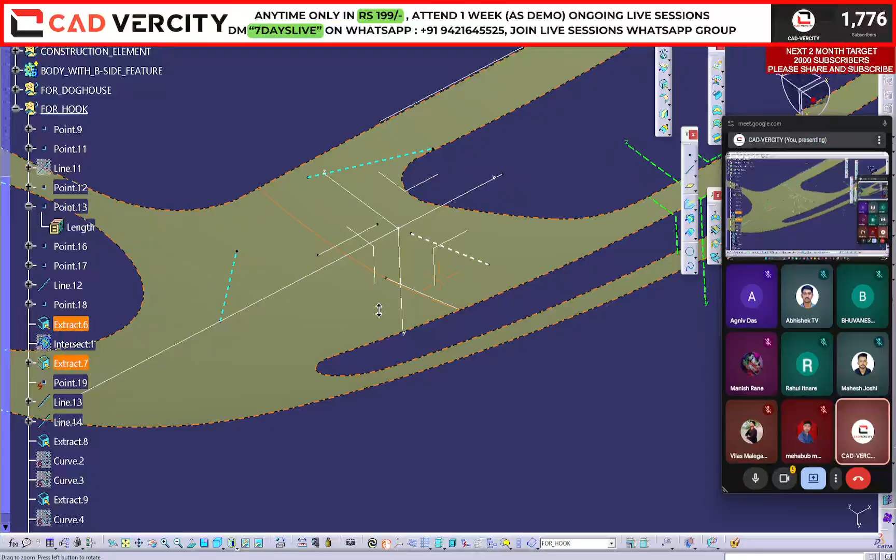Yes Abhishek. Sir, what happens if we break this relation sir? This is our part only, part se, you can keep the relation. See, it's not kept anyhow. You have extracted this surface from your closed volume, I think so. Yes, this is your closed volume's own surface. So you can keep the relation. Why should we break? Good question.

Yeah, Abhishek is asking a good question. Sir, why do we need to break the relation? Anyhow it is from our history. Good point. Even though we change our part, if we change it, it will still go to update. Perfect, so that is the logic.

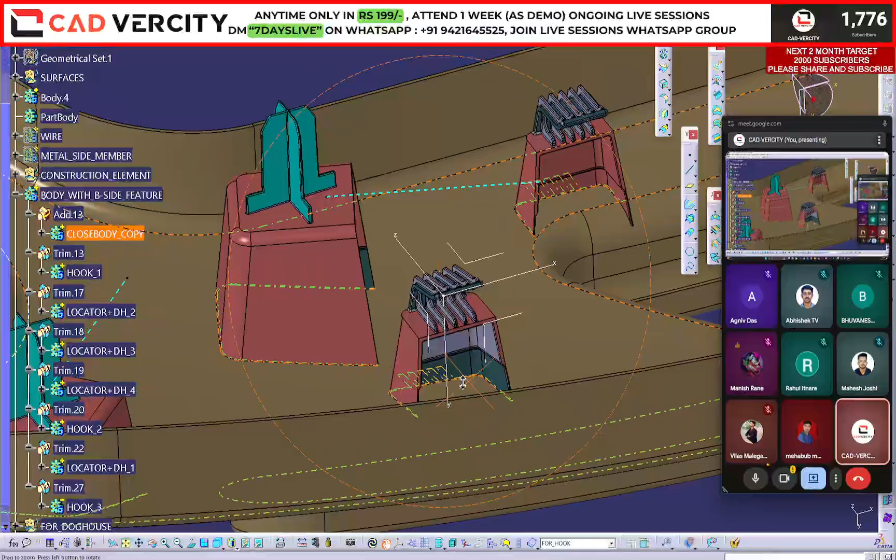So don't break the relation. Got it? Yes or no, Mahesh? Rahul, Manish, Vilas, Mehabub, all are mute. Yes, sir. Yes, sir. Perfect. So it's 12:30. Let's take a break.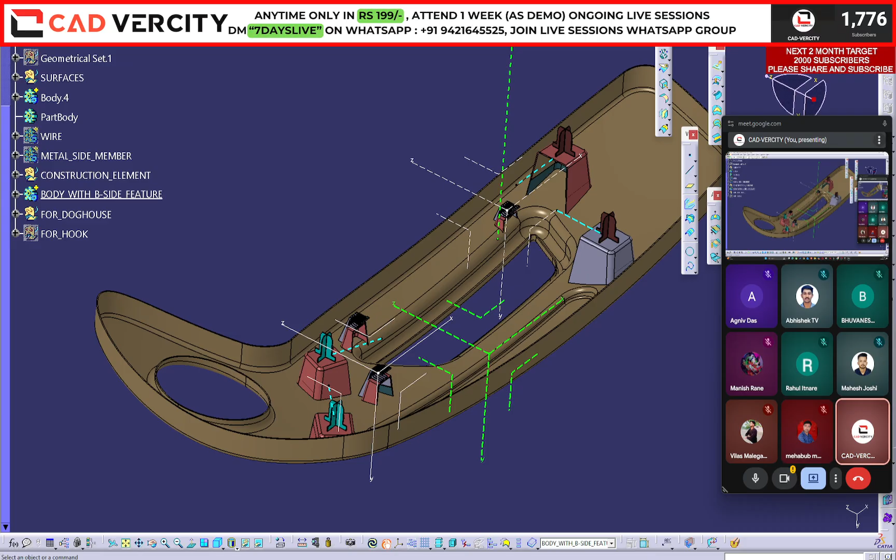Test cup holder for test, no, yeah, this one, yes or no? Here there was variable thickness, yes or no? I think I will have to check. See, CAD test.

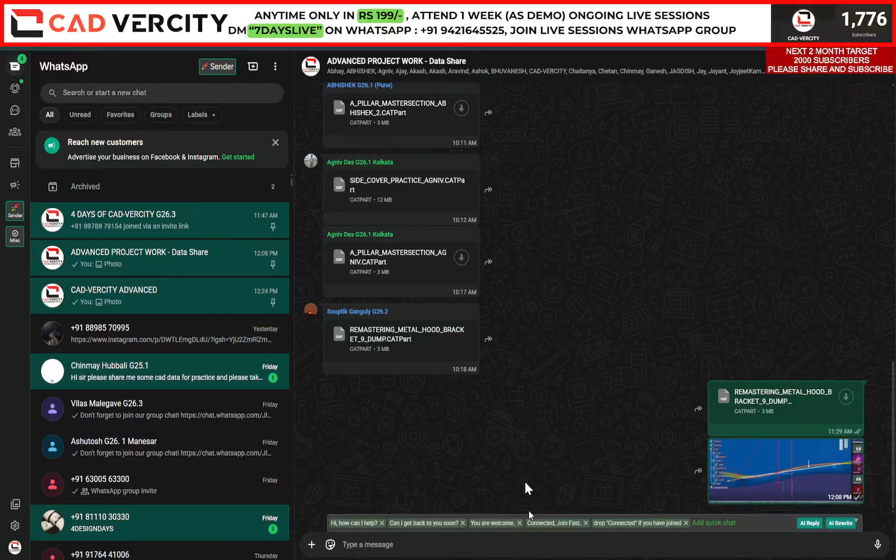Did you do variable thickness in this, yes or no? Tell me here. No, sir. So just do this thing. See, I'm sharing this file with you in data sharing. Okay, just go through the screenshot. See, this is a task. Closed volume, tooling direction you are given, box effect you have to do. So what is box effect?

On this corner you will have to keep 1.8 mm thickness, in the rest portion you have to keep 2.5 mm thickness. Clear? We had not kept 1.8, we did the whole thing at 2.5. Okay, now this time you will have to keep 1.8 on this corner only, only on one corner, not on all four corners. Clear? How can we do that? That is your test. Okay, just think on it.

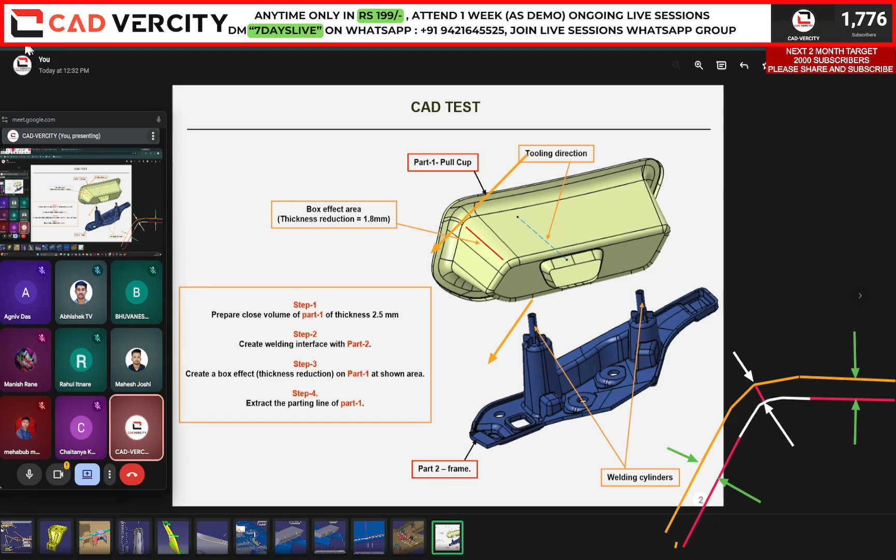Okay, got it sir. This should be 1.8, so this will be variable, and this will be 2.5. Clear? Without any step. So here is the red line, middle of the corner. Clear? And this is the actual test for 1.5 hour. Okay, we call it as box effect.

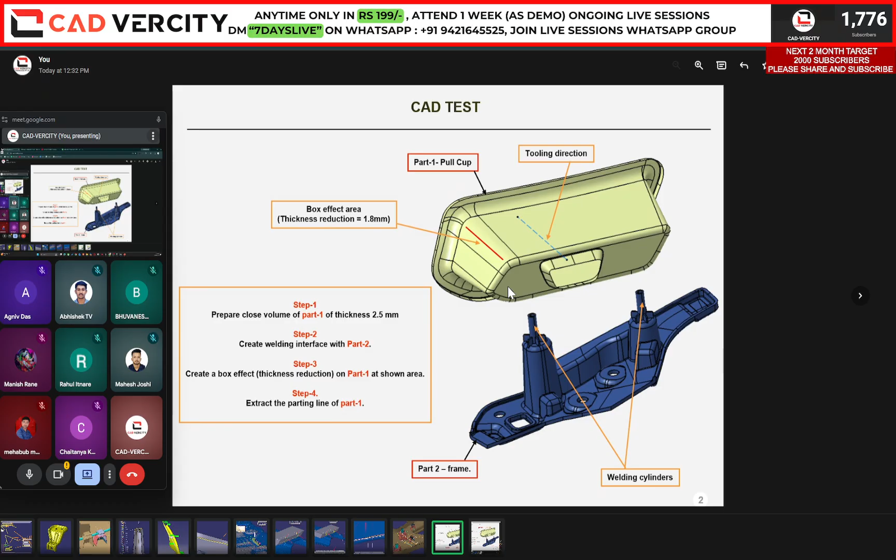Sir, what is box effect? You can check and you can answer in next session what is box effect and what is the purpose. Whatever question you have, just search on Google, ChatGPT, YouTube, and in next session you will explain what is the box effect. Okay, so you have the file. I think you have completed the complete closed volume with 2.5 mm uniform thickness. Now you will have to consider the non-uniform 1.8. And share the screenshot, and also please mention the time.